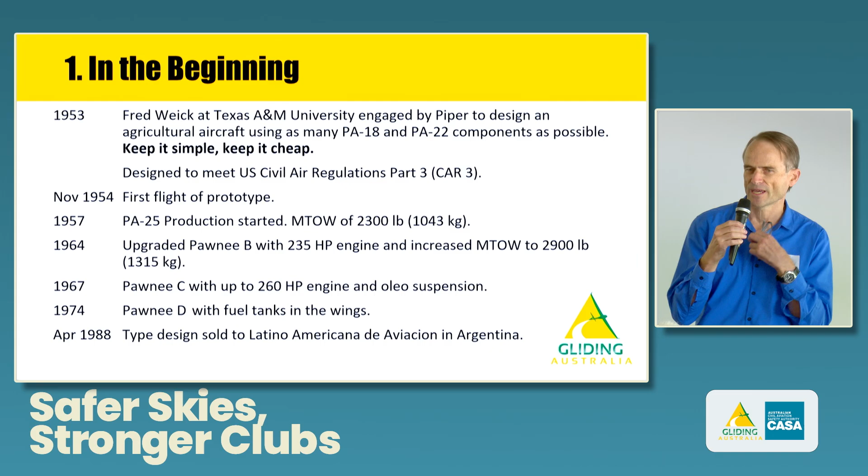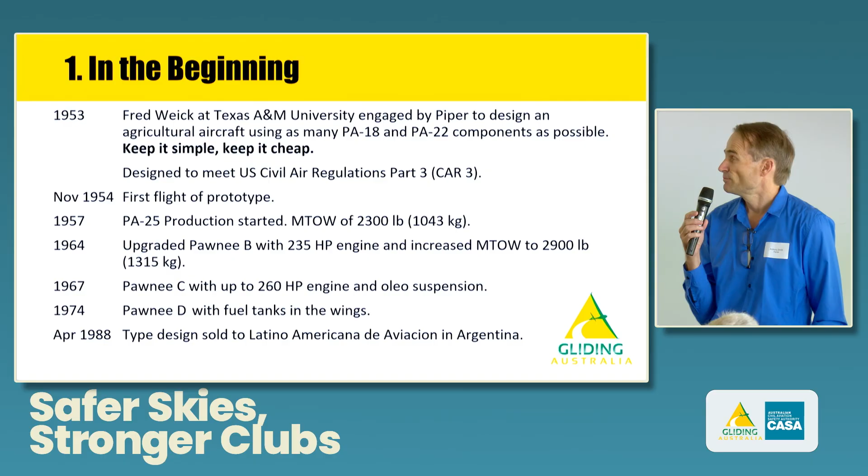So a little bit about the Pawnee and its design history. A chap called Fred Weick was working at Texas A&M University, and as a design project came up with a purpose-built agricultural aircraft. Most of the aircraft doing ag work at that time were converted military types. He ended up being engaged by Piper to develop the design into what became the prototype Pawnee, and they used as many of the Super Cub and Tri-Pacer components as possible in order to keep the costs down.

It was designed to meet US Civil Air Regulations Part 3. This is the 1950s design regs. Important thing to remember, in those design regs, there was no requirement to do any kind of fatigue analysis on the airframe. Fatigue was not understood back in the 1950s. So it was designed to static strength requirements. That was it. No lifetime requirements were considered.

It started production in 1957. The maximum takeoff weight was 2,300 pounds. I'm sorry, because it's an American aircraft, I'm going to default to imperial units. I'm sorry for all the metric people.

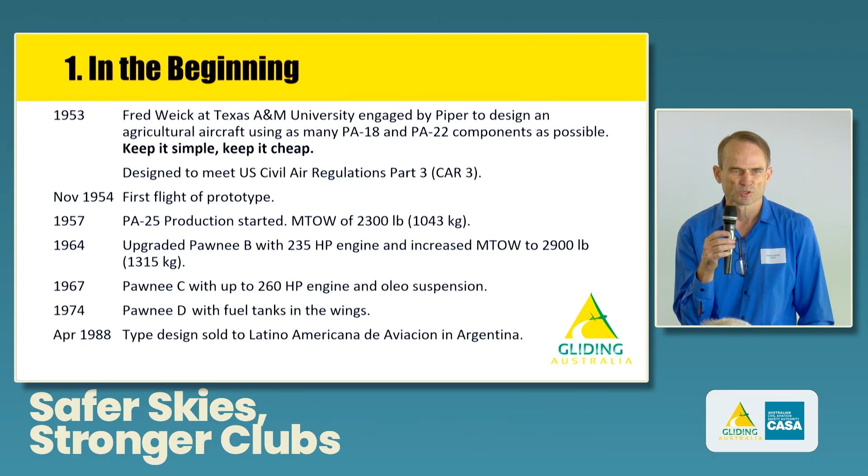In the 60s, it got upgraded to the Pawnee B, with more powerful engines, but importantly, they increased the max takeoff weight to 2,900 pounds.

They introduced the Pawnee D with fuel tanks in the wings in the mid-1970s. Production wound down into the early 80s, mostly because sales had dropped off, as other larger airframes like Air Tractors were becoming more economic.

The design got sold to the Latino Americana de Aviacion in Argentina, also known as LAVIASA, and they started production of their own version there. I do not know how many they've built.

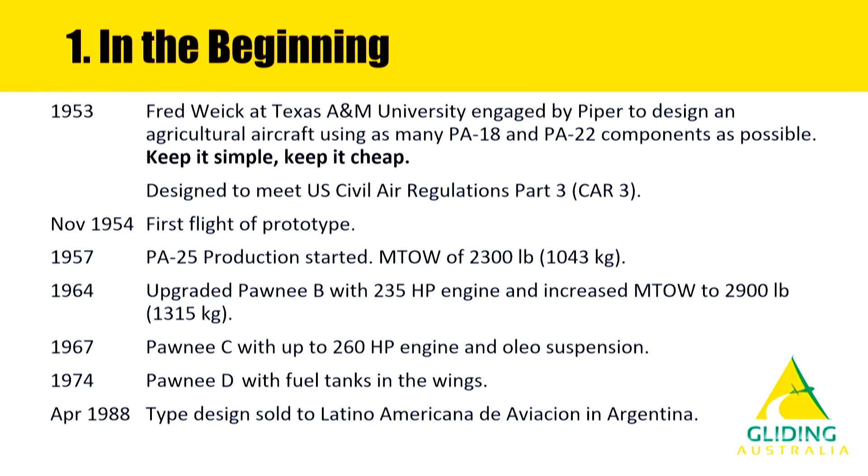One of the questions I get asked routinely is, why aren't we seeing inspections on the Super Cub? It's the same wing. So a little bit about forces on the aeroplane.

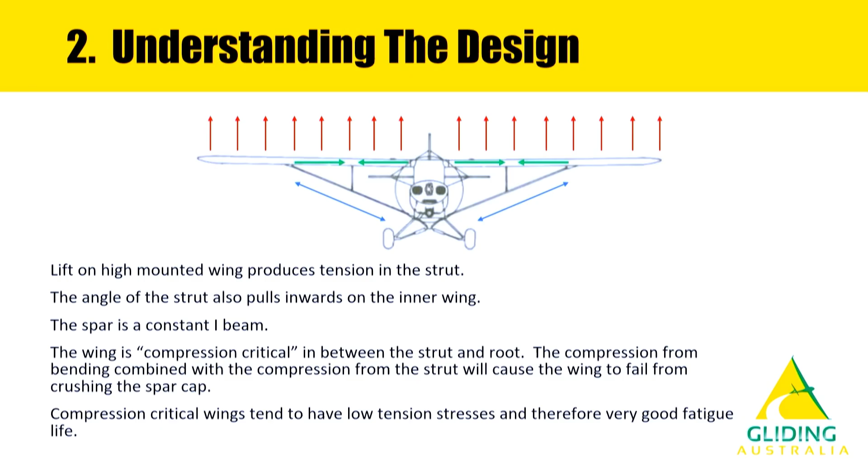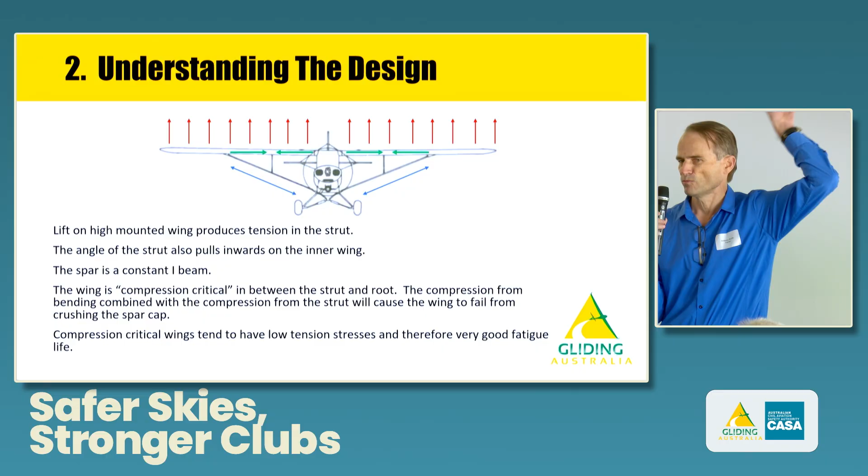Wings producing lift. The struts on a high-mounted wing are being held in tension, pulling the wing down. If you imagine these struts trying to pivot around the fuselage, if you try to lift those struts up, they're going to pivot inwards towards the airframe, putting compression on the inboard wing between the strut and the root.

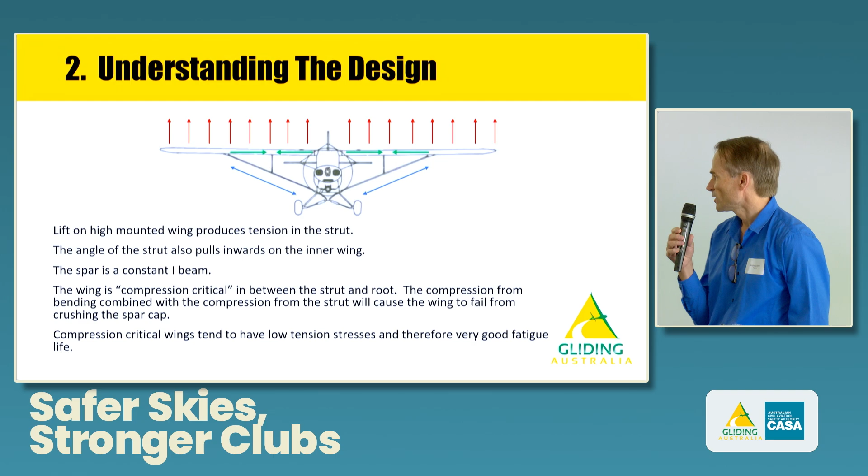This is what we call, in engineering terms, a compression critical wing. The compression from the bending and the compression from the strut add up such that the failure mode will be crushing of the spar cap, a bit like a Coke can. Compression critical wings will have low tension stresses predominantly and therefore very good fatigue lives.

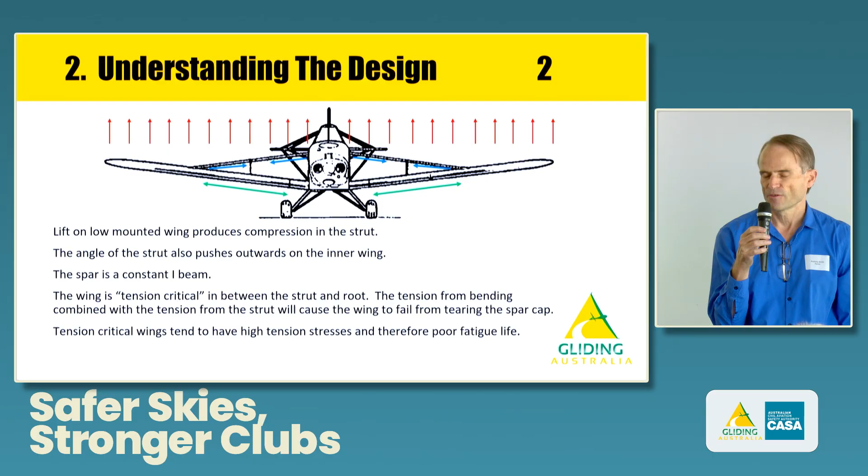The air loads put a bit of an S-curve in the wing, so we get tension on the underside between the strut and the root, combined with tension from the strut reaction, and the critical failure mode is tearing of the spar cap apart. These tension critical wings have high tension stresses and a much lower fatigue life as a result.

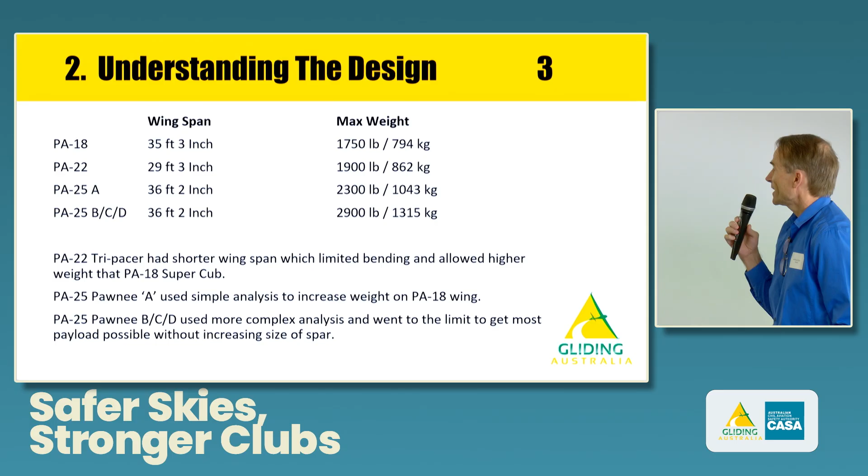Some design history: the PA-18 wing is very similar to the Pawnee's, with a max weight of 1,750 pounds. They increased the weight for the Tripacer by shortening the wingspan, so there's less wing bending on the Tripacer, and that's how they bumped up the max takeoff weight.

With the Pawnee, it's got the same wingspan between root and tip as the Cub, just with a wider fuselage. They increased the weight to 2,300 pounds. I've been fortunate to have a copy of part of the analysis used for the early model Pawnees, and it's a pretty simple wing analysis, stress-wise.

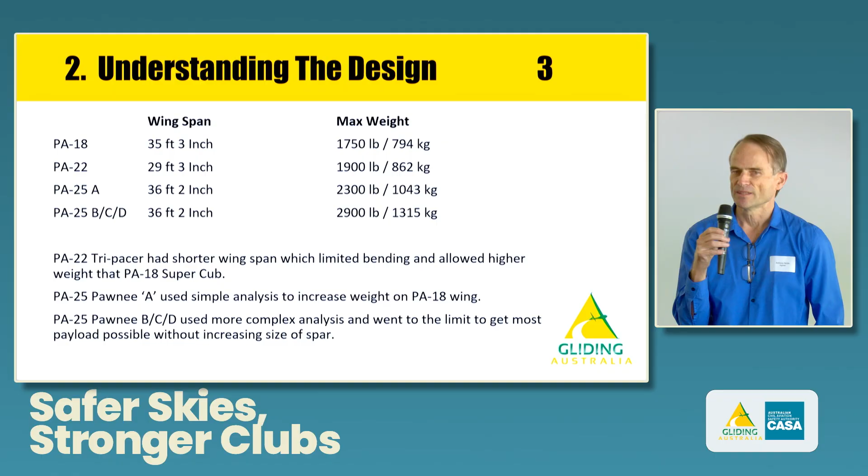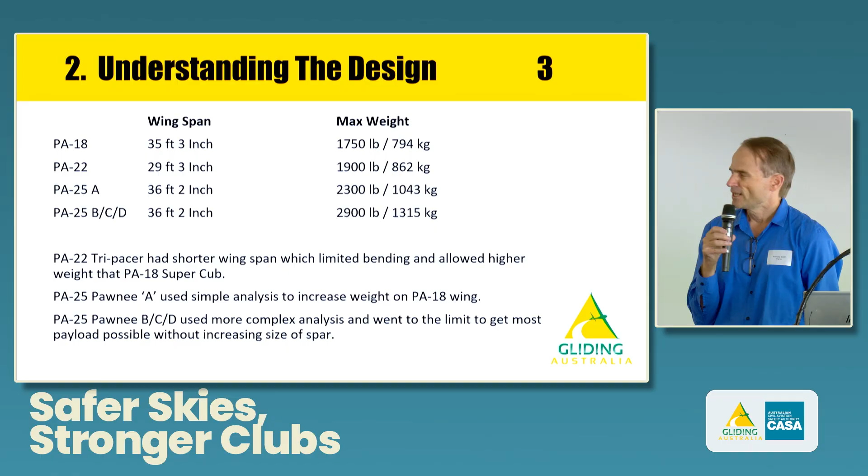With the B, C, D models and the increase in max takeoff weight, they took that design to the limit. There's no fat left in that wing, no residual strength whatsoever. It's taken to the absolute limit to get that 2,900 pounds, so we're working at very fine lines on the structural envelope of the aircraft to achieve that.

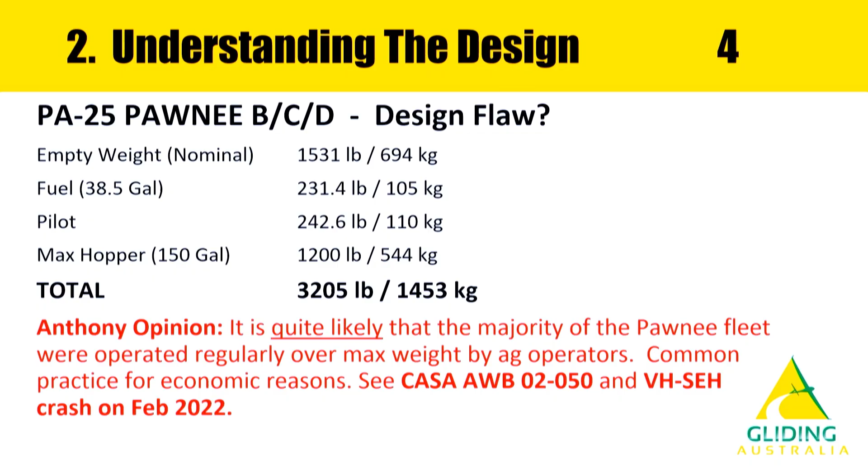Coupled with that, there's potentially what I'd consider a bit of a design flaw in the aeroplane. It has a hopper that can contain 150 US gallons, carrying 1,200 pounds of water, or roughly 1,200 pounds of superphosphate, depending on how granular it is. If it's a pretty fine grain super, you can get more than 1,200 pounds in the hopper.

That means with full fuel and a mature body-shape pilot, you can end up well over 3,200 pounds, well over your max takeoff weight. It's my opinion, and there are quite a few anecdotes out there, that the majority of the Pawnee fleet operated by the agricultural community were routinely operating above max takeoff weight.

That puts a lot of stress on the airframe. Now, CASA did put out Airworthiness Bulletin 02050 that allows agricultural operators to operate beyond max takeoff weight, but on the proviso that they do a fatigue analysis and work out the life of the airframe. I'm not aware of that fatigue analysis ever having been done, but I'm pretty sure the operation was happening above max takeoff weight.

Even recently, the crash of Sierra Echo Hotel, an ag operator in Victoria—the ATSB can't prove it, but they're pretty sure the aircraft was trying to take off overweight and simply didn't have the performance available for the runway length it had at the time.

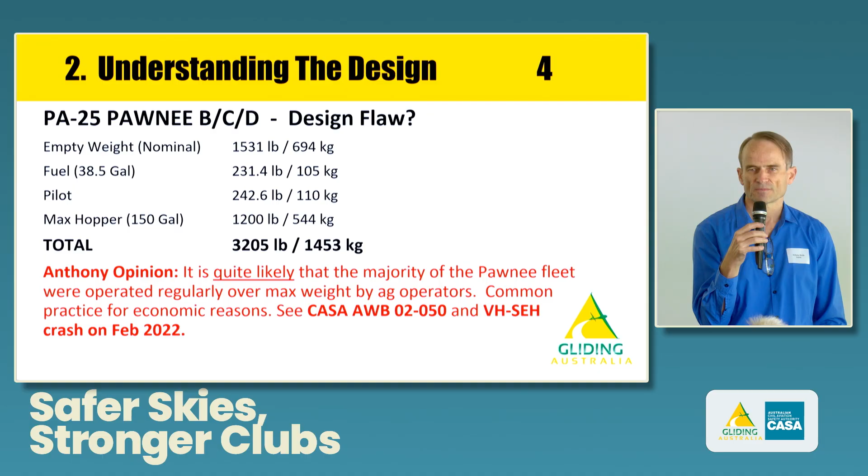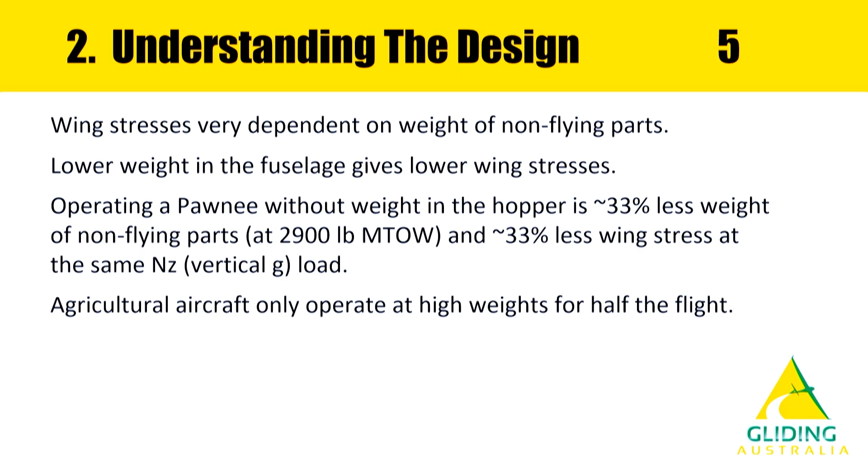So wing stresses are very dependent on the weight of the non-flying parts. If you have less weight in the fuselage, you have lower wing stresses. Some numbers there: operating without weight in the hopper gives 33% less weight in the fuse, thereabouts, and that means 33% less wing stress for the same vertical G load.

So, in aeronautical terms, NZ is your G load in the vertical direction, NX is your horizontal acceleration fore-aft, and NY is lateral acceleration. So where you see me using NZ, it's all about vertical G.

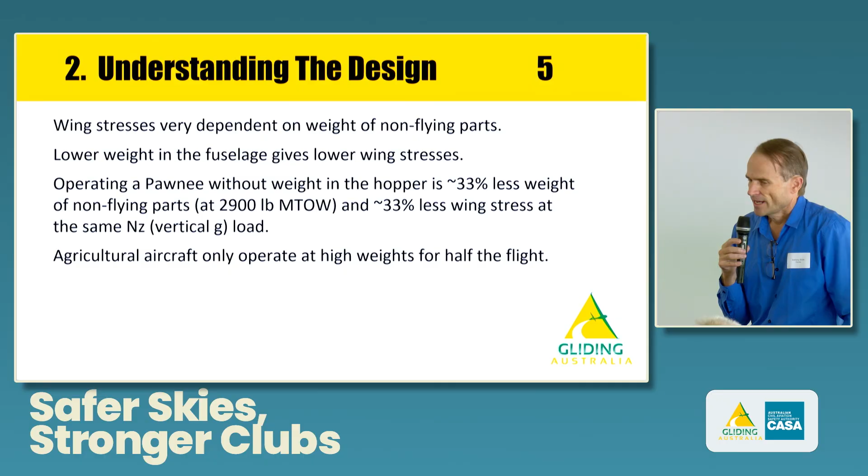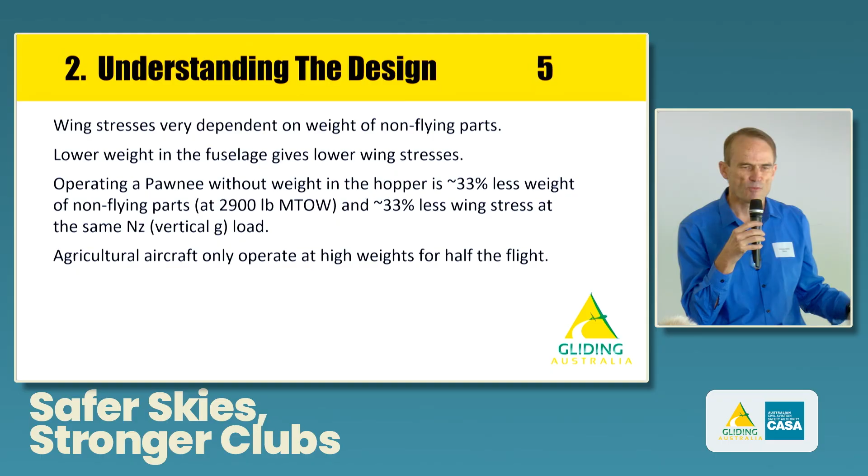Just a reminder that agricultural aircraft only operate at those high weights for half the flight. They are transiting out to the drop zone or application zone, dropping the payload, and coming back empty. So that weight saving and fatigue saving we get from operating the aircraft very lightweight is not quite as apparent as operating the aircraft at high takeoff weights for 100% of the time.

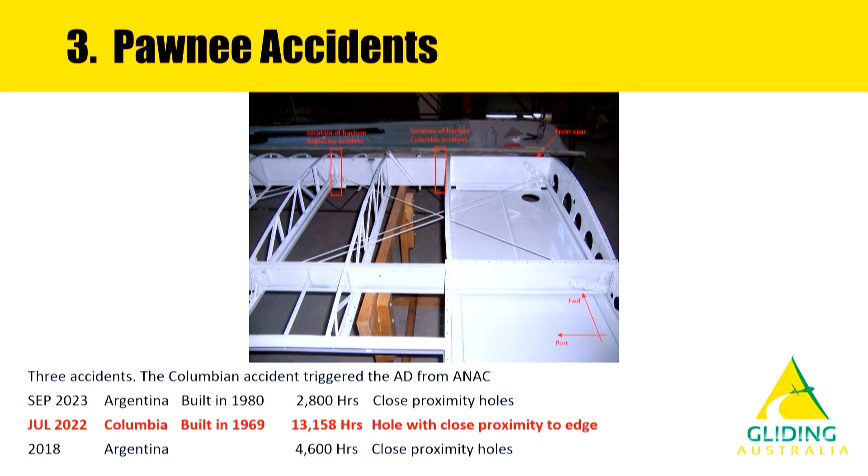So some recent Pawnee accidents that I can find evidence on. There were 3 accidents mentioned in the service bulletin concerning the holes and the corrosion. I can only find an accident report for one, which is the Columbia accident in 2022. This appears to be the accident that spawned the AD.

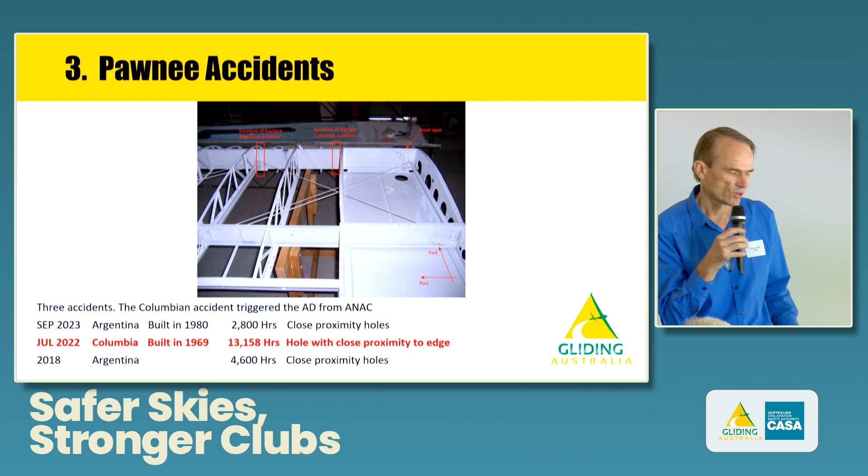The aircraft had 13,100 hours on it, and it was caused by a hole in close proximity to the edge of the spar. That's the accident aircraft on the left.

The right-hand wing separated as he pulled out of a shallow dive to begin an application on a rice paddy. The aircraft cartwheeled into the ground, hit nose first, ended up inverted against a tree. The pilot was able to extricate himself out of that mess as the wreck caught fire, had minor burns to his ankle as he got himself out of that.

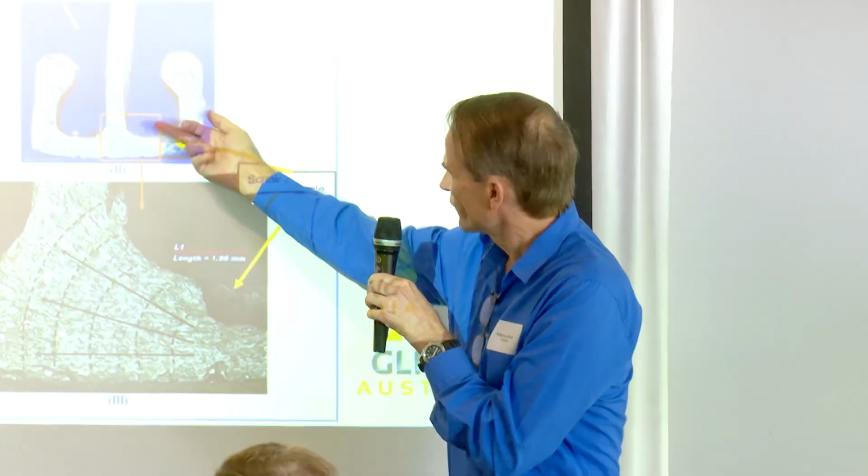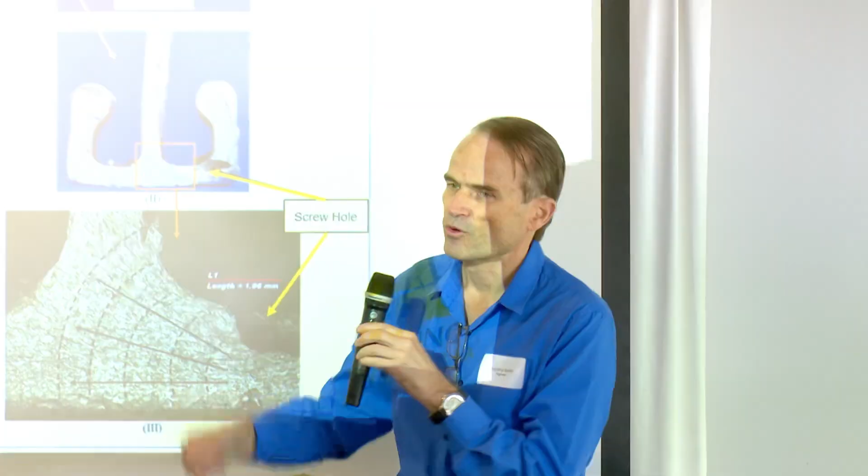The failure was caused by a hole drilled into the corner of the spar cap for a leading edge replacement. The crack expanded from there, severed completely the lower spar cap, had grown up to a point about here before fracturing the spar completely.

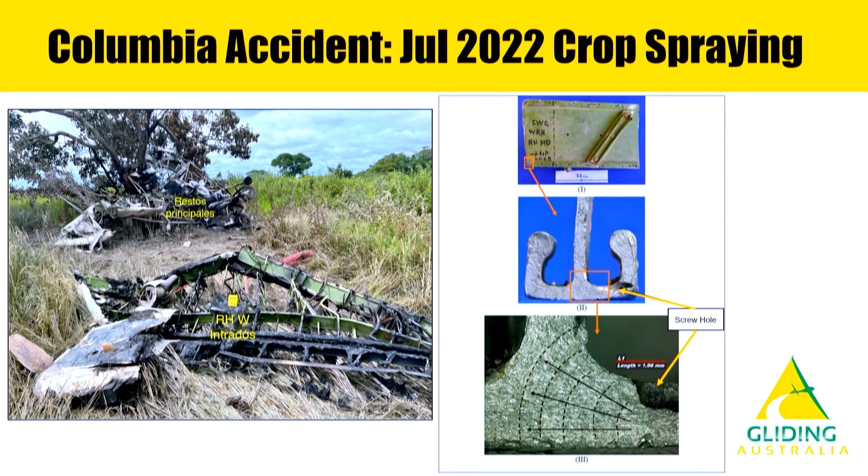Of interest to us is this was on the lower cap between the strut and the root. This is not in one of the current fatigue inspection areas. This is a pretty low stress area of the wing, yet the proximity of that hole to the edge was sufficient to still grow a crack enough that it ended up causing failure.

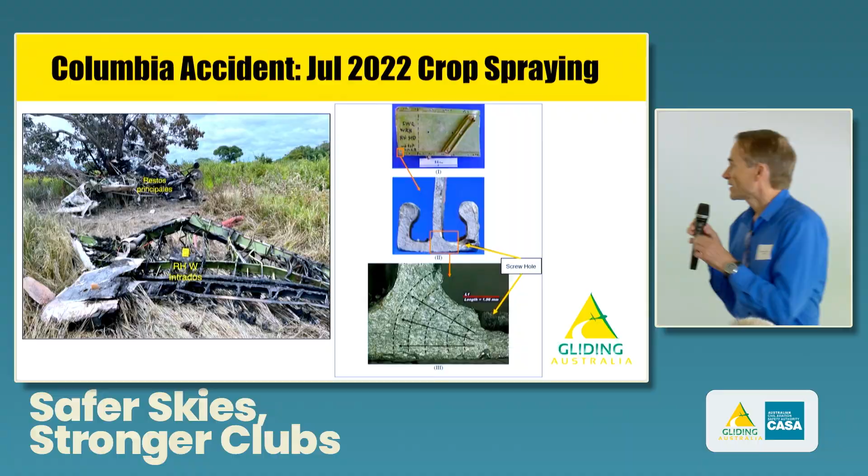And that crack, that hole, was so close to the edge that as soon as they put the screw in, it probably fractured the little bit of aluminium there to start with, just by putting the screw in and severing that little bit of aluminium that was left.

So where are we at with the current inspections worldwide? We're all familiar with the Argentine recommendation, or Argentine AD. We've got an interesting approach to safety by inspection with the aircraft being based on calendar years. We've got the one that we know and love, which is the eddy current every 100 hours or 12 months, whichever comes first.

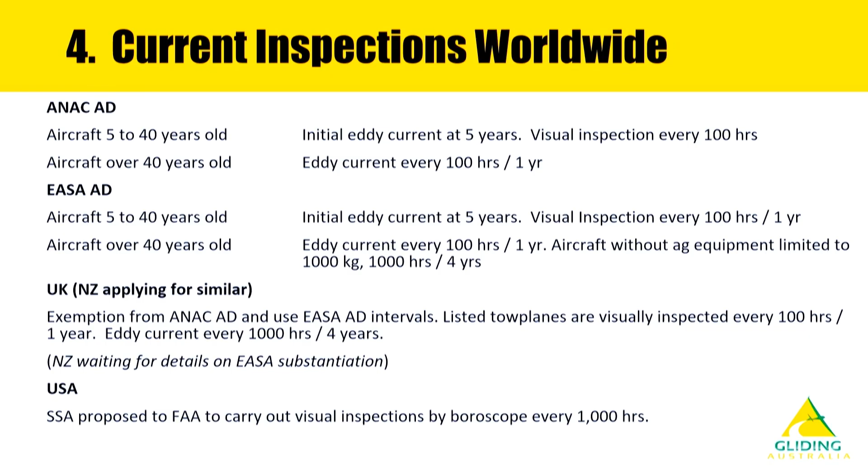EASA have gone their own way. They still retain the age requirement, which is again interesting from an aircraft fatigue point of view. It has the inspections we're interested in every 4 years or 1,000 hours, providing the aircraft is being operated below 1,000 kilos or 2,200 pounds for the uninitiated, and has the external agricultural equipment removed. That means the aircraft has to be placarded to having that 1,000 kilo limit on the instrument panel, and changes to the flight manual.

The UK has recently been successful in getting an AMOC approved based on the EASA inspections. New Zealand is trying the same stunt at the moment. They've put an AMOC in to try and use the EASA inspections in lieu of the Argentines.

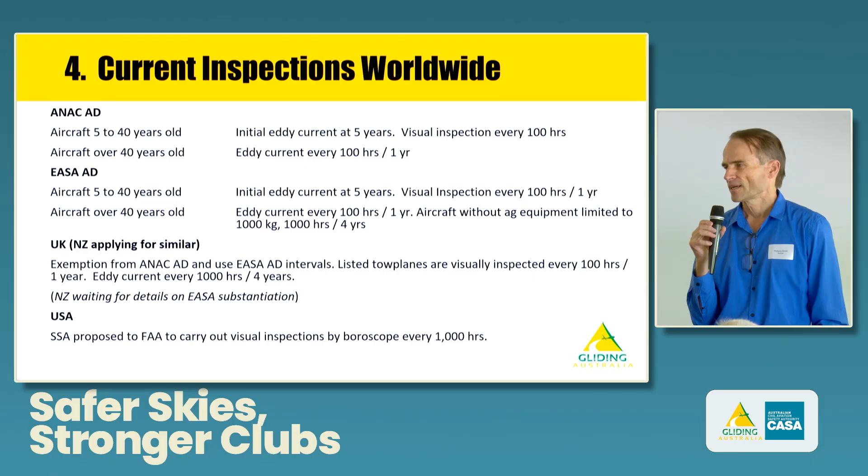They've got a bit of a hold up at the moment where CAA New Zealand is trying to get hold of the substantiation that EASA used. EASA were not able to provide me with the substantiation they used for their AD themselves, but they did provide it to the airworthiness people at CASA. CASA have reviewed that and said it was insufficient to enable approval of an AMOC here in Australia. So it didn't meet their standards.

The USA, the FAA put out a proposed AD warning in early December last year. Submissions were closed on the 1st of January this year. I sat down and spent a lot of time with the Soaring Society of America, helping them put together their proposed inspection. They want to use visual inspections with an inspection camera, not removing the screws where possible, and do that every 1,000 hours.

We're expecting the FAA to make a decision in the August, September timeframe, maybe. It's unknown at this point in time. I am reasonably confident that the Argentines are not going to do anything in the near future until the FAA has made a decision.

So to talk very briefly about fatigue life stuff. There was a lot of interest in the 1970s in Australia and other countries in collecting fatigue spectrum data. Fatigue mechanics as a science had progressed a lot during the 1960s into the 1970s, and was the hot topic in aeronautical circles of the day. A lot of research was being done in the area.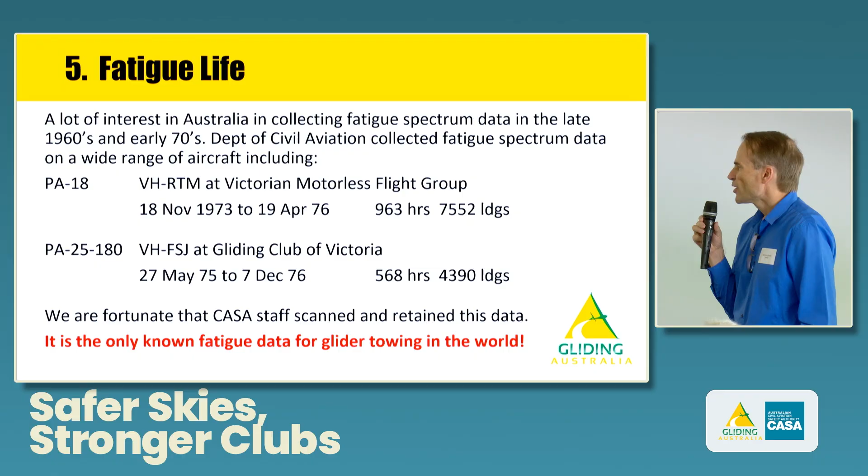We're really fortunate that CASA staff opened a desk drawer, found these sheets of paper lying in the bottom of the desk drawer, no joke, this is real, and they decided to scan it and keep it for posterity. We lost a little bit of data. It was an automatic sheet feeder scanner, and there's a couple of areas where the pages overlapped slightly, so we lost a little bit of data, but not very much. This is the only known fatigue data for glider towing in the world that I know of. It's unique.

And this is what it looks like. To understand these charts, you've got your vertical G on the vertical axis. 1G is straight and level. And you've got the number of times per hour you exceed that G level on the horizontal axis. It's a logarithmic chart, unfortunately, it's the way the data is presented. It makes it a little difficult to interpret.

But you've got three lines there. One is the agricultural use, which is the dark blue line. Glider towing is orange. And I've put in the general aviation, which is the dotted green line. That's for single engine private use from American data.

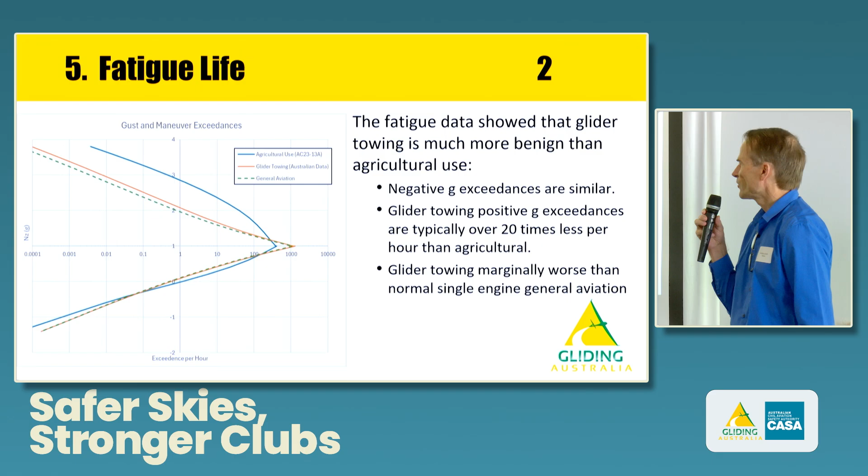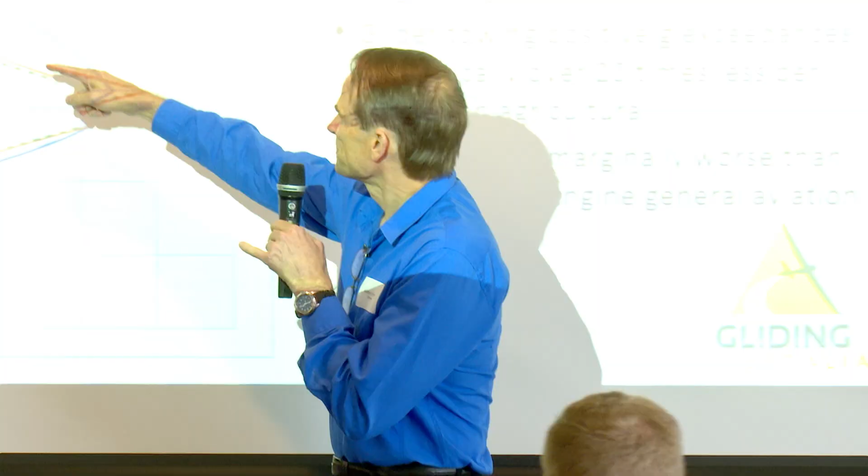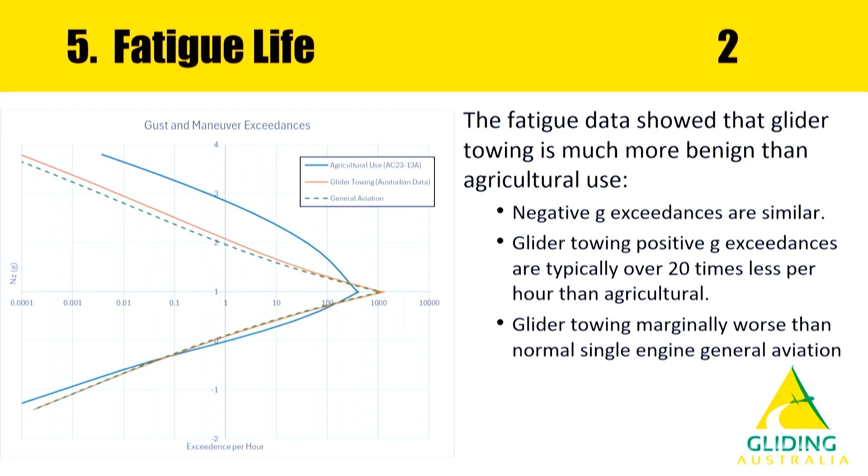So if we were to look at this and say, what's the number of times a glider tug would exceed 2G, it would be 1.5 times per hour. So we're looking at this point of the chart. For general aviation, it's a little less than once per hour. For your agricultural aircraft, 10, 20, 30, 40 times an hour. That's a measure of how aggressive agricultural flying is compared to glider towing.

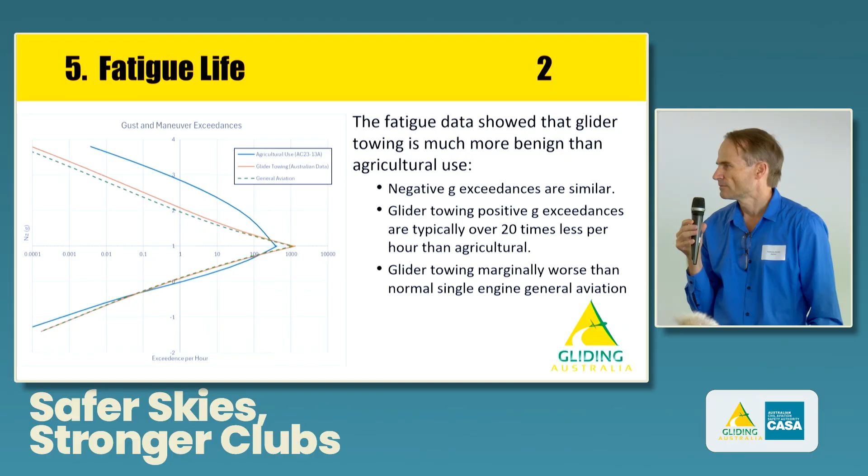So on average, our positive G exceedances are around 20 times less per hour than agricultural. We are marginally worse than normal single-engined general aviation, and that's mostly because we are doing so many flights per hour. We're doing a lot more circuits per hour. The negative G is pretty much the same between all operations.

When I've been working through the numbers, it's become pretty apparent that what's driving the fatigue life on both agricultural aircraft and glider towing is the ground-air-ground cycle. So wings on the ground, wings in the air. Wings on the ground, wings in the air. It's that bending cycle between those.

In Australia, the data shows that agricultural aircraft are doing 9 flights per hour. It's the way that they would deploy to a paddock or a farmer's strip, load up the Pawnee, hop over a couple of fences, start applying, hop back over a couple of fences, land, reload, go again. Whereas in America, they were doing 4.7 flights per hour because they were using a regional airport, transiting out, applying the super, transiting back. In comparison with glider towing, we are averaging 7.8 flights per hour, which is around 6 times more than what the general aviation average was, which is 1.3 flights per hour.

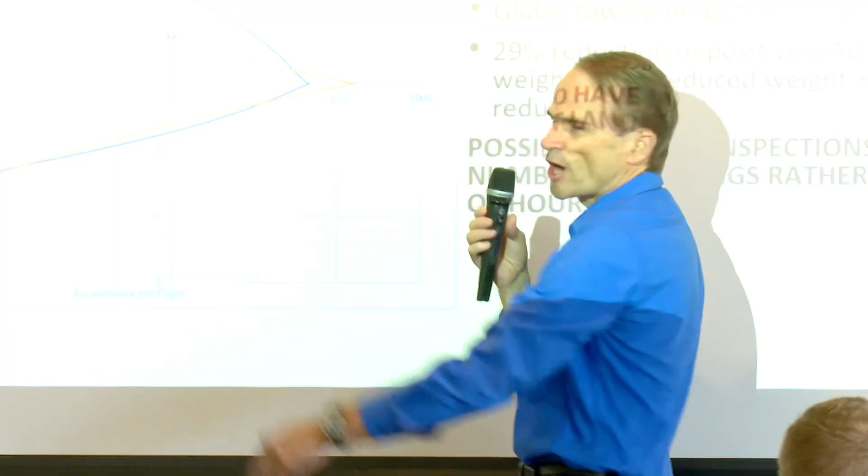Now, this chart on the left-hand side has been modified a little bit from the previous chart, and you see this is the exceedance per flight. So I've worked out how many times per flight we end up going to a particular G level, and you can see there's considerable saving there.

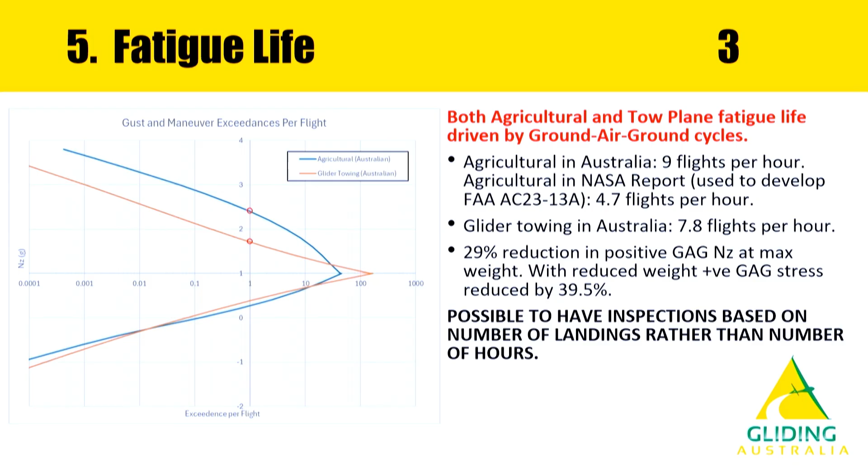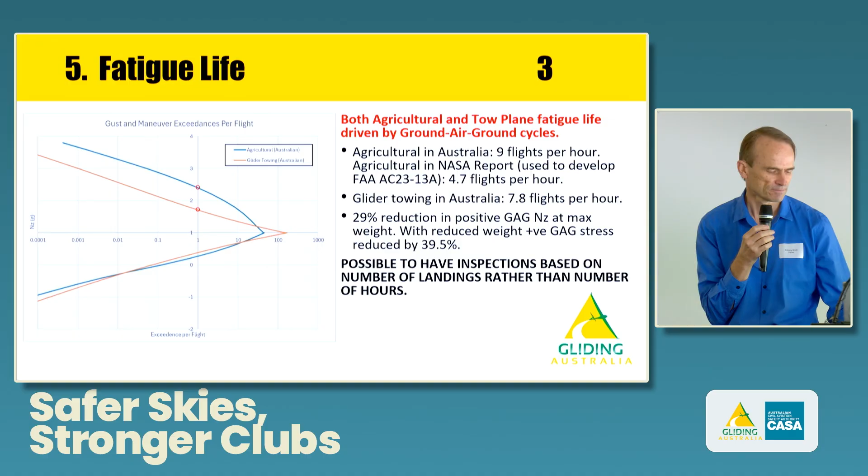However, while working through this, given that agricultural aircraft are doing all their manoeuvres, all their high G stuff each flight, the length of the flight is rather irrelevant because that's just straight and level transit. It's probably better to actually have the number of inspections based on flights or landings as opposed to per flying hour, which would be your traditional view of looking at fatigue life. And the same goes for glider towing as well.

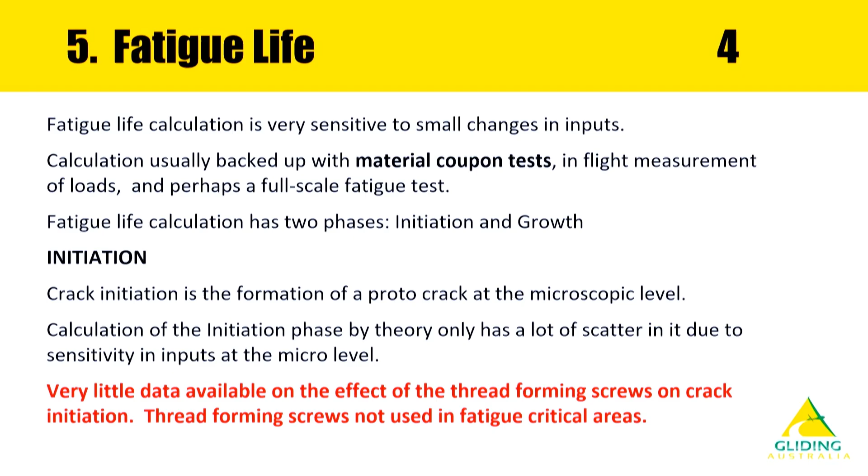When you're working through fatigue life calculations, it's quite sensitive to small changes in the inputs. Normally, this is backed up by a team of people and not just one individual. You have a lot of material coupon tests to back up the theoretical numbers you're plugging into software, in-flight measurement of loads, and perhaps even a full-scale fatigue test. And I'm pretty sure people have seen either images or videos of airliners or large transport aircraft in the rig having their wings stretched up and down repeatedly, day in, day out.

We are probably going to get some material coupon tests, and I'll talk about that in the next slide. When we start talking about fatigue life calculations, you've got two phases: an initiation phase and a growth phase.

With the initiation phase, we're talking about the formation of a proto-crack at the microscopic level in the metal. It has a lot of scatter in the calculation just due to the differences in the metal and changes at the micro level. We have a bit of a problem in that we are using these thread-forming screws in the metal - it's not a clean round hole - and there is very, very little data available on the effect these thread-forming screws have on crack initiation.

Because thread-forming screws are not used in fatigue-critical areas on aircraft design, this is possibly the world's only aircraft where this happens.

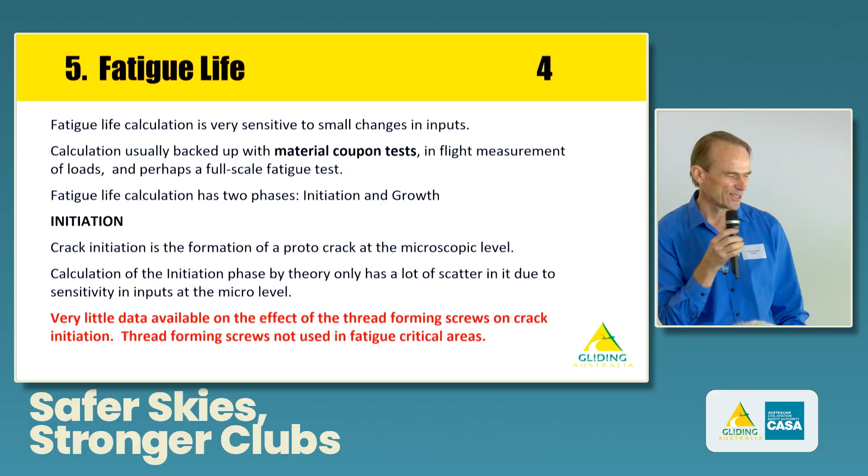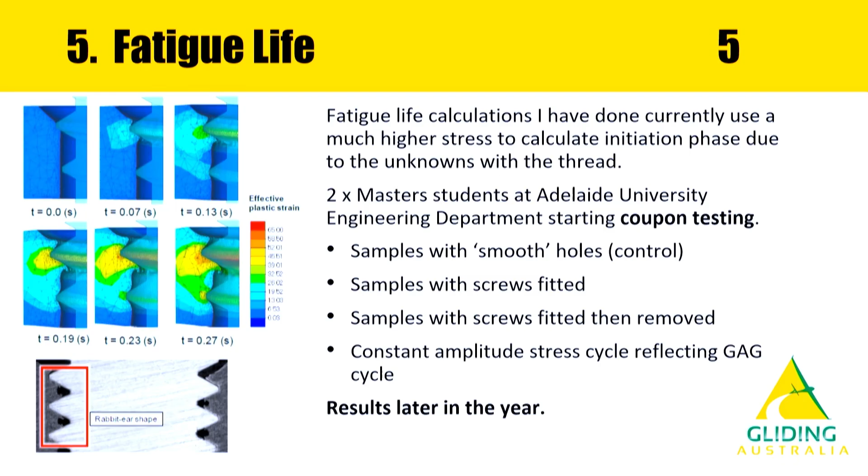So at the moment, when I present the numbers, just bear in mind that I've had to account for a few known unknowns here. I've used much higher stresses at the screw holes to account for the fact that I don't know quite what's going on with the thread-forming screws at the moment.

As of beginning of March, I now have two master's students at Adelaide University Engineering starting coupon testing, where we are going to be getting some samples of 6061 T6 aluminium sheet, not extrusion, sheet metal. We're going to get some little samples in a machine that's going to stretch the metal repeatedly for hours on end to start developing cracks at holes.

We're going to do three batches: a smooth round hole, which is going to be our control batch, some samples with screws fitted, and then samples with screws fitted then removed. Then we can start trying to sort out what the impact of the screws are on crack initiation and development. The results will come out later this year.

The imagery on the left is from a Japanese technical paper published in 2024 talking about the stresses imparted on the metal as the screws are inserted into it. Some of the interesting things is what they theorise: as the screw is being inserted, it's shearing the metal around with it as it's deforming the thread, so it's being carried along with the thread and then moving down the thread as it goes along. So you're getting these wave patterns as it's being deformed.

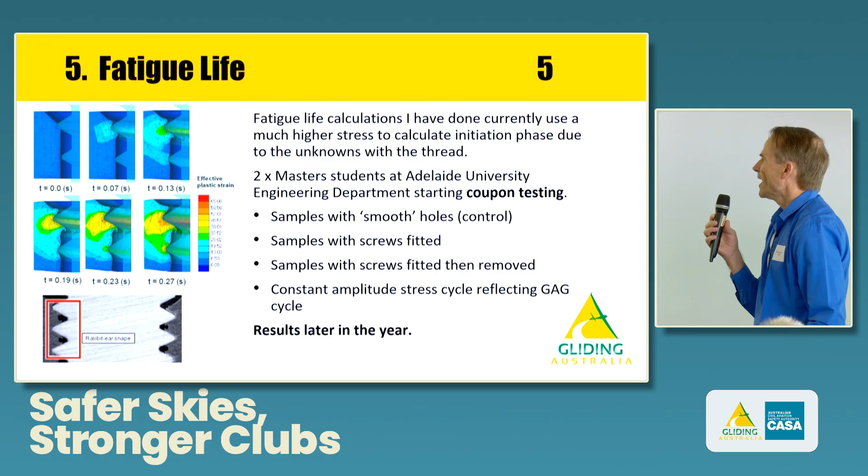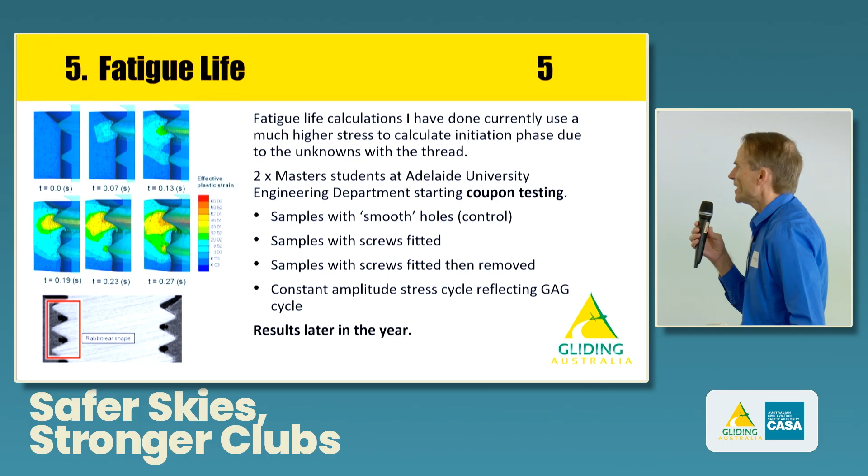The other downside is that around the area of metal that's been deformed, you'll have a donut of metal that's still being stretched, but not enough to deform it. That area of residual tension will result in, if the crack goes into there, it will accelerate the crack growth because you've got this extra bit of tension from around that field. We will hopefully get some results on that later this year.

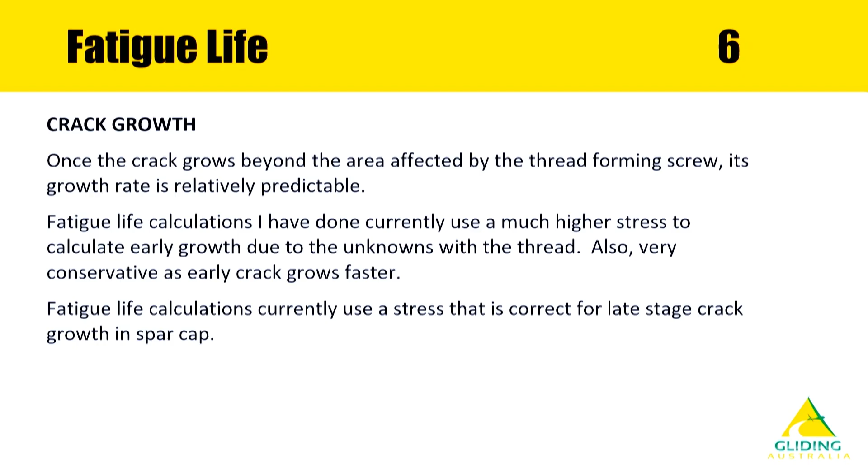Once the crack grows beyond the area affected by the thread-forming screw, it's relatively predictable mathematically, give or take a bit. Again, I've used a much higher stress in the early stage of the crack growth, mostly to do with the unknowns with the thread, but that stress is pretty good for the late stage. If the crack grows into the spar cap, I'm using the spar cap stresses, so the crack growth rate in that late stage is pretty good.

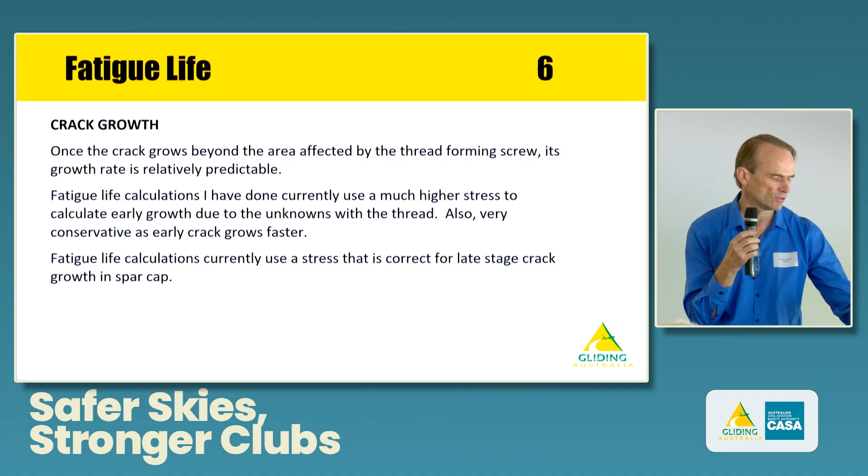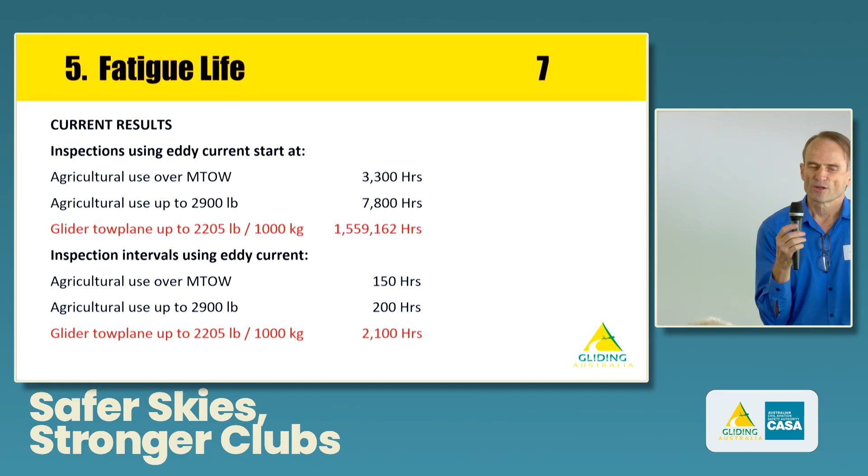So these are the results at the moment based on using eddy current as your inspection technique. You can expect to start finding cracks in an agricultural aircraft that's been operated regularly beyond the max takeoff weight after about 3,300 hours of use. If the ag pilots behave themselves and stay below max takeoff weight, 7,800 hours. That's not a bad number.

When I went into this, I was thinking, based on other work and other aircraft types, 8,000 hours on an ag aircraft is pretty reasonable as an answer.

For a glider tow plane with spars that have only done glider towing, that's something astronomical. We are so benign, it's not funny. That 1 million hours is not a joke. Even if you don't trust my numbers and divide that by 5 as an extra safety factor, you're still in the order of 300,000 hours. If you're doing 150 hours a year, what's 2,000 years worth of flying?

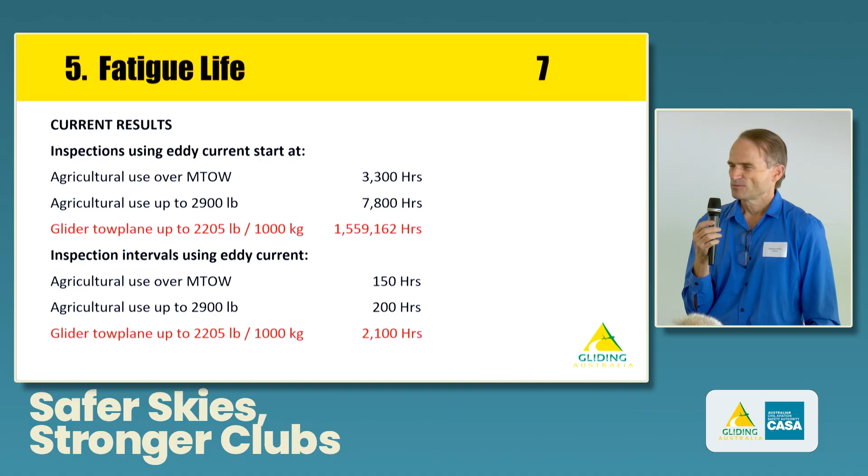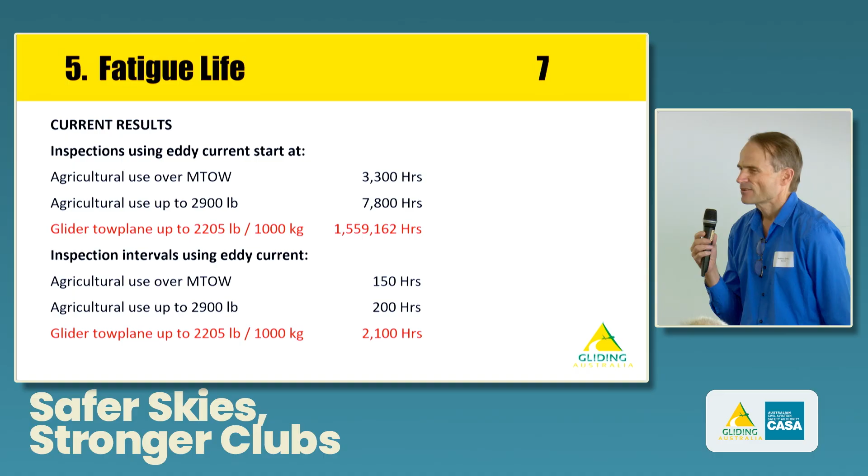Inspection intervals: agricultural use over max takeoff weight, 150 hours. Normal agricultural operation, every 200 hours. Glider tow plane, after it's exceeded these kinds of lifes, every 2,100 hours, based on the numbers at the moment, using eddy current inspection.

And here's where I get lynched. The areas that the AD is focusing on are based on where they've had crack detection and crack failures in service. These have all come out of holes which would be considered abnormal to the design.

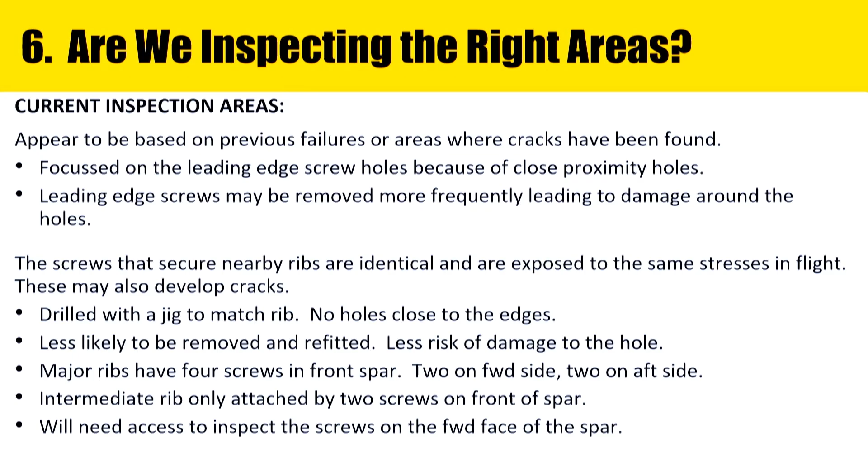Holes that have been too close to the edges, holes that have been drilled too close together. The AD does not allow for these holes to be allowed to go flying anymore, so they should be removed from the gene pool.

Which means what other holes are nearby that are similar to the leading edge screws that are also in high stress areas? Unfortunately, that means it's the rib holes. The screws in the nearby ribs are identical to the screws we're using on the leading edges.

Now these have been drilled with a jig at production so that they fit up to the rib. So they're all very centred to the flange on the spars. There's no holes close to the edge of the rib holes. They're not going to be removed as frequently, so there's less damage to the hole by the remove-refit cycle.

But the major ribs have 4 screws, 2 on the forward side, 2 on the rear side, and the intermediate ribs have only 2, on the forward side. In my opinion, we'll need to start inspecting the screws on the forward face of the spar as well, because they're still a risk area not being addressed by the current AD.

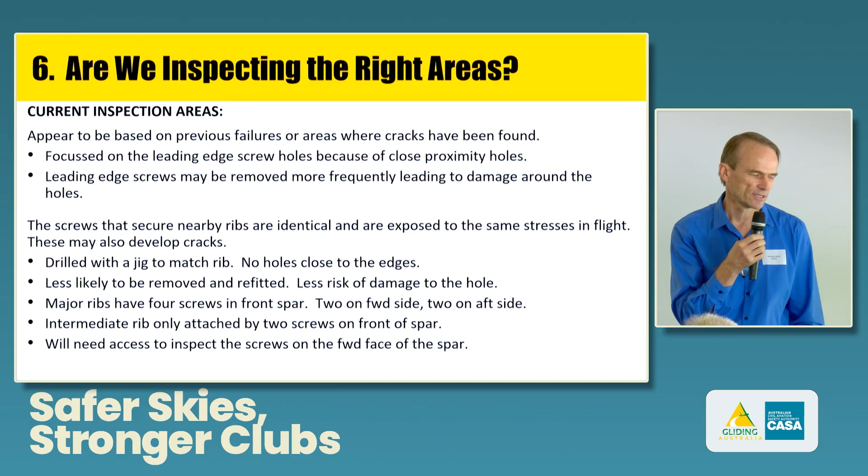So, despite having done all those numbers, I've been asked to reconsider the work I've done so far and try to find a way that we can do this via visual inspection techniques.

This is synergistic with what the Soaring Society of America proposed to the FAA, using an inspection camera that can get into the gap between the flange and the spar web and check for cracks visually, without removing the screws where possible.

Visual detection is the least trusted method of inspection for cracks. Everybody trusts eddy current, nobody trusts visual inspections. This is going to be a pretty hard sell to CASA. We're going to have to come up with some fairly convincing arguments as to why they should allow us to go down this road.

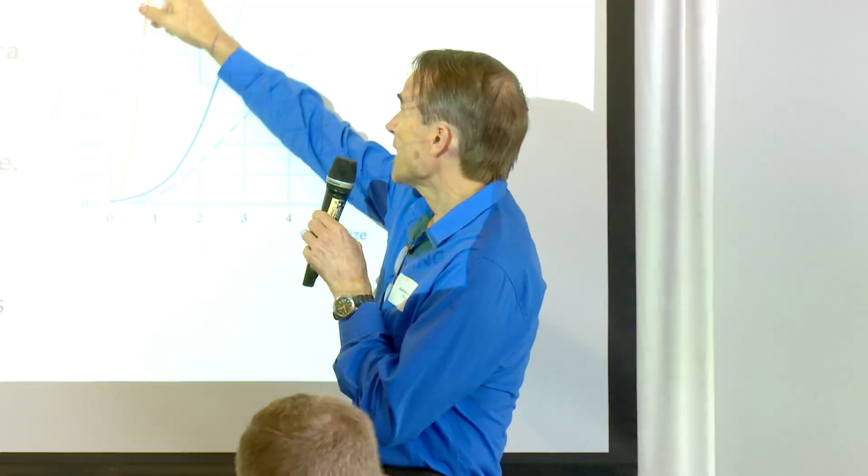When we talk about inspection methods, we talk about how likely it is that method will find a defect that is there. With eddy current, shown as the orange line, there's been a lot of study done on this technique, and it says that at 1¼ millimetre, or 50 thou in the old language, you've got a 90% chance of finding a crack of that length.

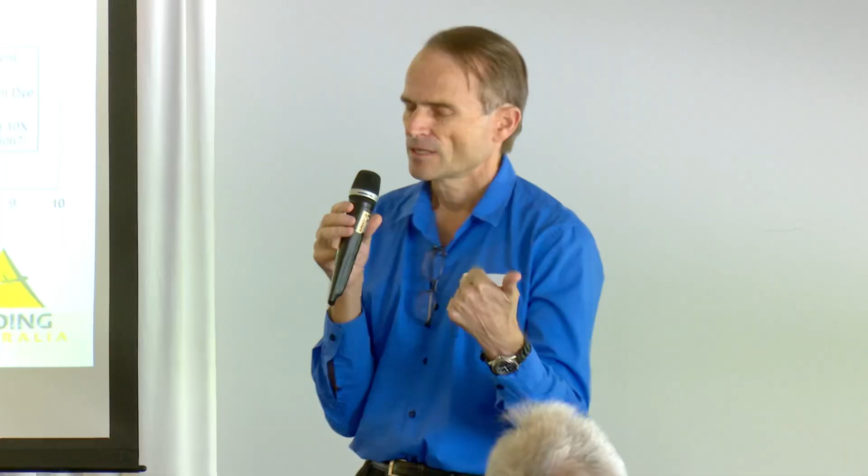So if you're using eddy current, you'll set yourself up to have 3 inspections between when the crack becomes detectable at that 1¼ millimetre length through to your maximum crack length criteria. The first inspection gives you a 90% chance of finding the crack. The second gives you a 90% chance of finding the 10% you missed, giving you 99% in total. The third gives you a 90% chance of finding the remaining 1%, so you're now at 99.9% chance of finding the crack.

We will need to try and do the same sort of thing with visual inspection. The dotted line on the curve is one I've made up based on some Boeing data, and it suggests that a 7.5, nearly 8mm crack would be 90% detectable using visual inspection.

That's a little misleading, I think—I'll talk about that in a future slide. But visual inspection is going to be very dependent on the gear we're using. It's likely we'll need specific equipment with a minimum camera resolution. The proposal already put before the board is that we should consider purchasing inspection cameras specific for this task, which can be hired out to clubs.

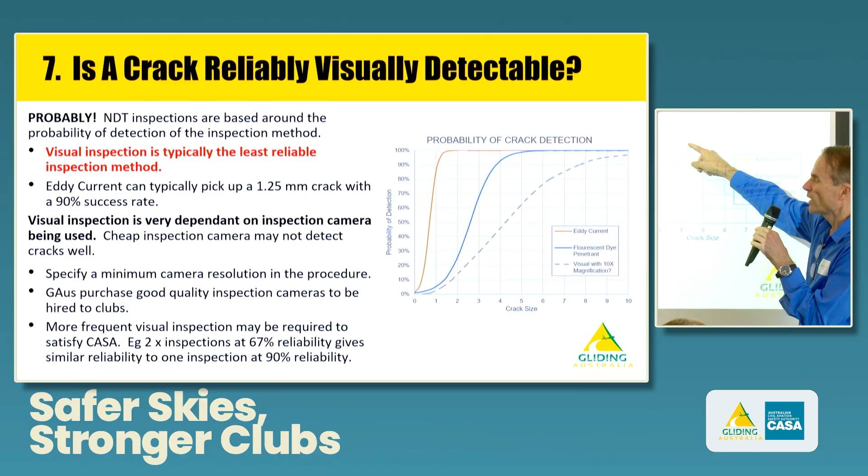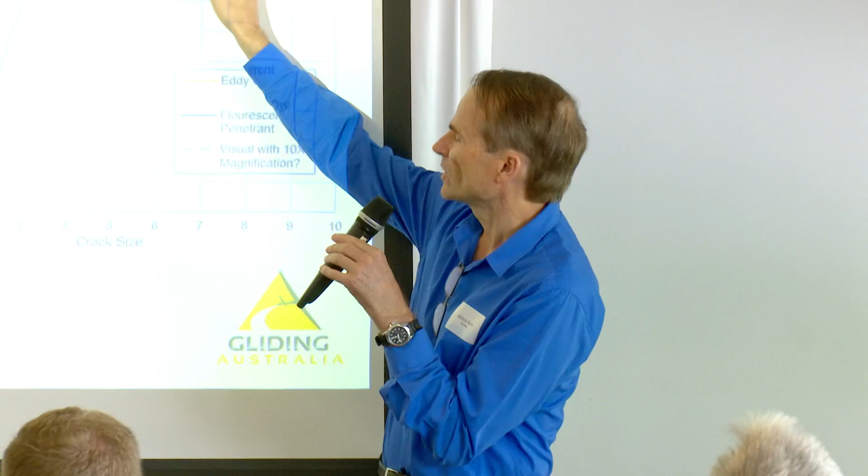The other way of looking at that last dot point is if you aren't happy with trying to find a long crack a few times, you can get that 99.9% chance of detection standard by trying to find a shorter crack more frequently. So you have a decision point: is it worth looking more frequently with a worse chance of detection, or looking less frequently with a better chance of detection? It's a bit of a cycle we need to work through to sort this out.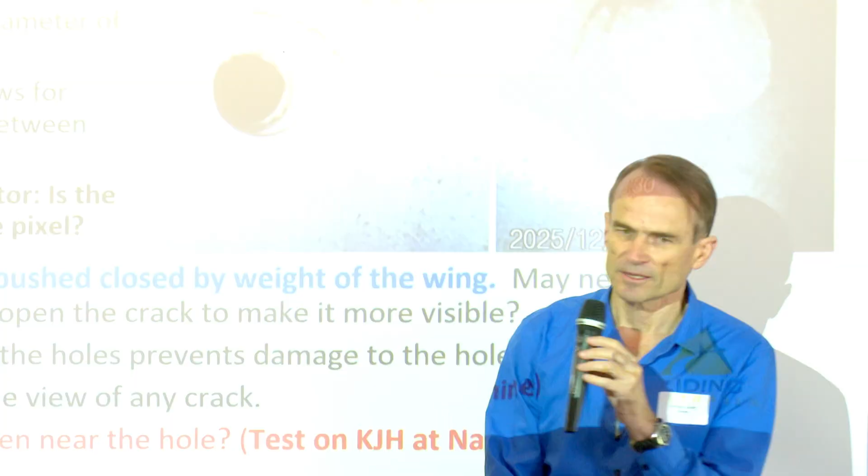These are all inside the flange. Note that all this material has been deformed out of the hole by the screw thread going into the hole. Important to note this little defect here, with the splurge that's come out - that's probably bad enough to give you a false alert with the eddy current, and you can't see that from the outside. So you can have an eddy current giving you a crack alert which is not really a crack.

Some of the things we need to be thinking about: on the ground, the weight of the wing could be holding the cracks closed. Whether or not you can see it on a digital camera depends on whether the crack is actually wide enough to be picked up as a pixel. So it's not so much the length, but whether the crack is open or closed and wide enough to be detected. The counter to this is you may need to apply a little bit of force to the front spar to open the crack and make it more visible.

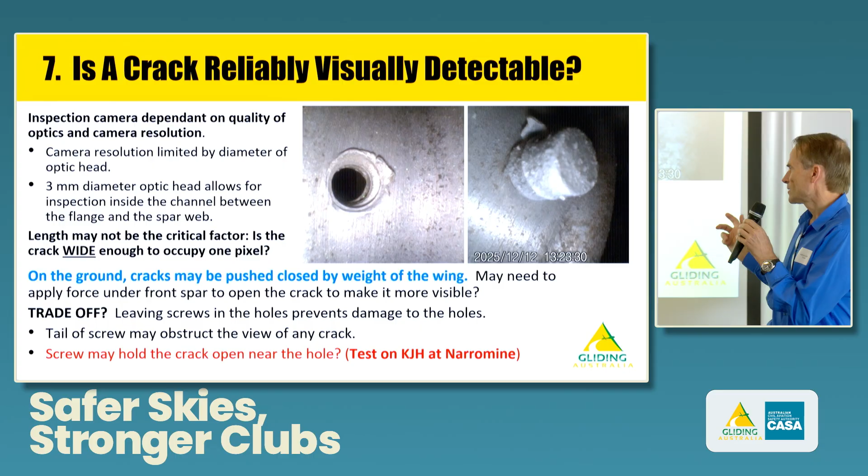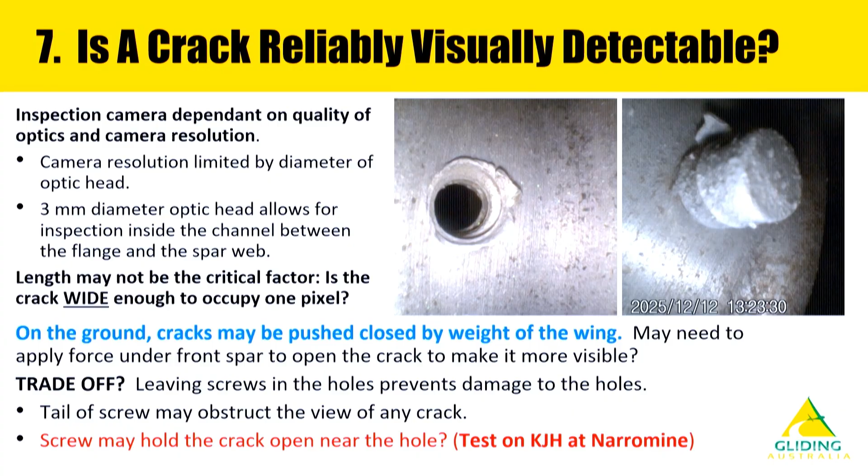The other thought is leaving the screws in the holes has a number of benefits. It prevents damage to the holes. Because you're getting that ring of tension around the outside of that screw, it's going to be opening the crack. Leaving the screw in situ may help make the crack more detectable visually. The downside is the tail of the screw may obstruct your visibility. So if you're looking for a crack coming out towards the flange here, the screw's in the way of a short little crack there - you can't see it. You're going to have to be moving the probe around to make sure you've got a good view either side of the screw.

We've had one crack detection on an Australian aircraft, that's at Narromine. I've now got, as of last week, a 3mm inspection camera here, and today is the first time I've had it in the same room as some Pawnee spar. So if people are interested, we can come have a little play at lunchtime with the camera and the Pawnee spar and see what we can see. But I need to get myself over to Narromine - I've got a diesel car, hopefully there's fuel enough on the way there and back again, or I'm going to be stuck somewhere in the countryside.

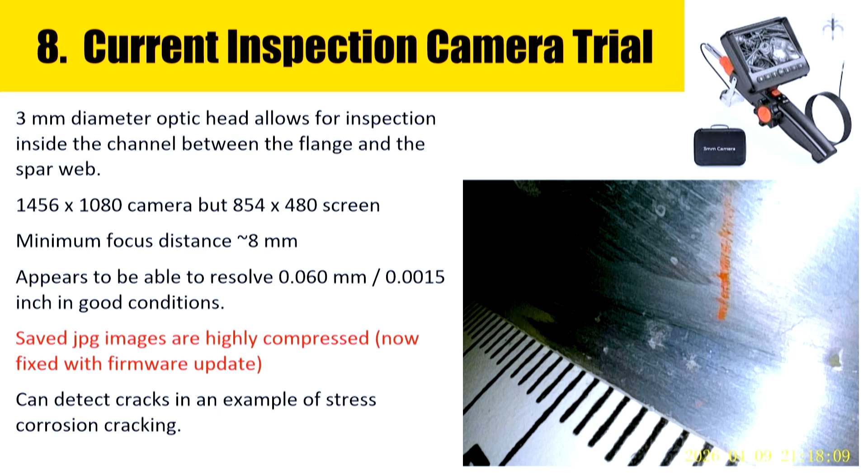Can we see cracks? The camera we've got at the moment is a reasonable resolution camera, but the screen's a little limited - there's a few things we can do there. My testing shows a minimum focus distance of 8mm, which is pretty good. My testing so far shows we can see down to at least 60 microns, which is the diameter of one of my hairs - that's in good conditions. I've been on to the manufacturer - they say JPEG images were a bit grainy because of a lot of JPEG compression. They've now given me a firmware update where that compression's been removed.

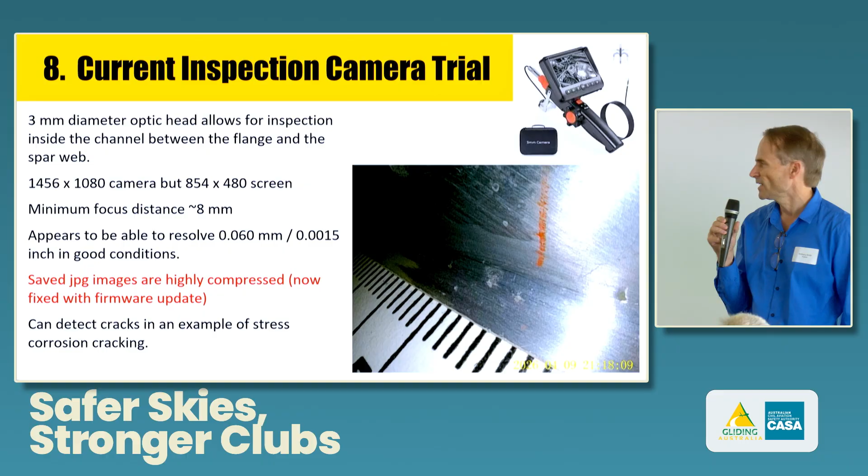I have a lump of aluminium off a P3 at home which has some stress corrosion cracking, and there's an example of it there. These little hairlines are the stress corrosion cracking at an angle of 70-75. Of note is there's a little line there which is stress corrosion cracking - that's all of 2 millimetres long. So it's not so much the length, it's really the width of whether you can detect it with the camera.

I have here a sample from an Arcus, I think it was. I know this is cracked, I know where the cracks are - the cracks are 2.5 to 3 millimetres long. Because these cracks are closed up and very tight, they're not under strain at the moment, I am having a lot of trouble seeing them with the camera, and this is even when I know where they are. So having the cracks open is going to be the critical bit, one of the critical links in this case.

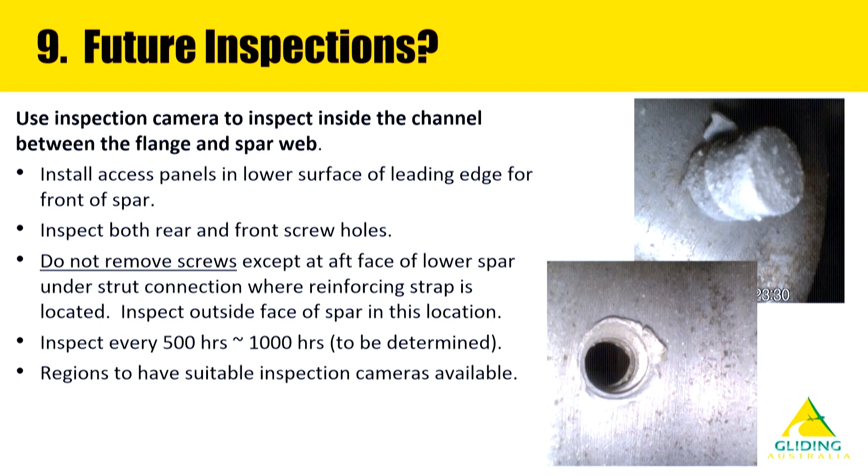So the proposal at the moment is to install some access panels in the lower surface of the leading edge so you can get access to the ribs on the front of the spar. We'll be inspecting both the rear and the front screw holes. This will be in 3 areas: on the wing root on the lower surface in the hard walk area, the existing inspection area on the upper surface between the root and the strut connection, and under the strut connection on the lower spar.

We're proposing not to remove any screws except on the aft face of the lower spar under the strut, where that reinforcing strap is located. It's unlikely we're going to be able to get the camera inside there. The inspection interval may be between 500 hours and 1,000 hours. I haven't done the numbers yet because I've got to work out what sort of crack length we're going to be able to see.

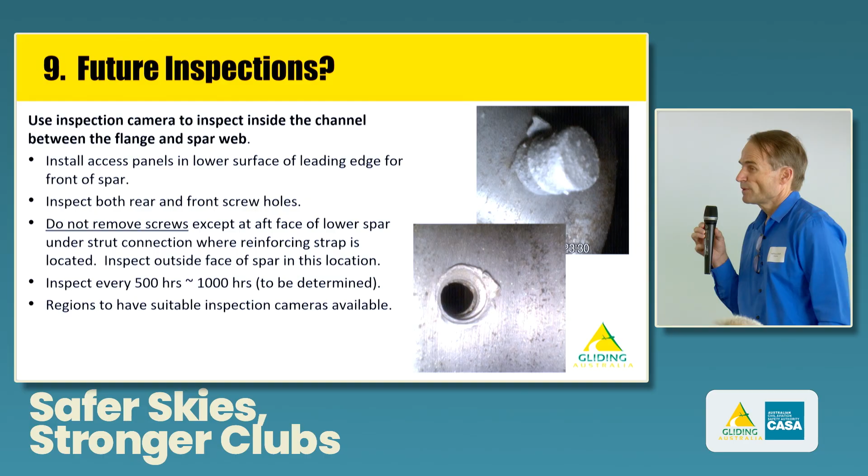The regions will need to have suitable inspection cameras available. The one I've got here is the cheap version with the shorter lead. The long version costs $1,000. So the regions will probably have 2 each, or thereabouts. If you're inspecting every 3 to 5 years, that should be plenty for the clubs to use and abuse.

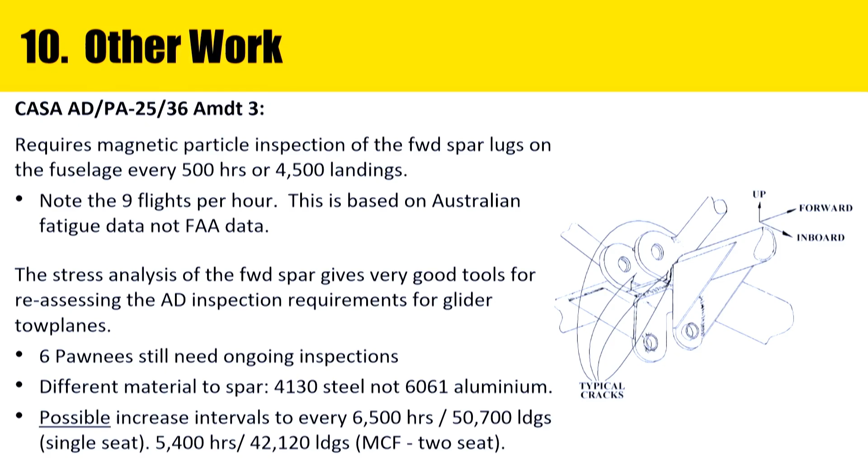Other stuff in the meantime - just because I'm a sucker for punishment and a bit of a masochist - CASA have an AD out for inspection of the wing root fittings. We've got 6 aircraft that still have the unmodified wing root fittings on the fuselage. 5 of them are single seat, one's the 2-seat conversion.

For the stress analysis tools, I created a spreadsheet that calculates in-flight loads on the spars for the Pawnee under arbitrary flight conditions, and another version for landing and another for taxi. That gave me some very good tools in order to analyse what's going on with the wing root connections.

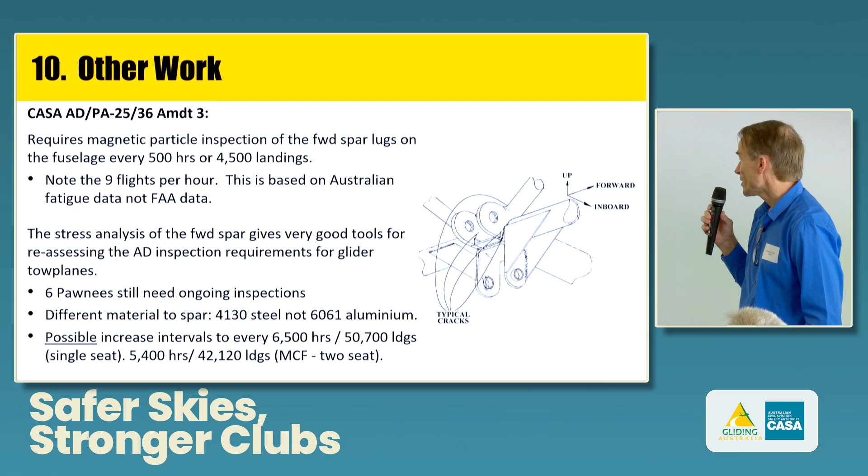I've got a report in with a Part 21 engineer at the moment which recommends increasing the interval to 6,500 hours instead of 500 hours on the single seat, and 5,400 hours on the 2-seat. Now that number for the 2-seat was based on the particular weight and balance of that aircraft - it's not applicable to all the 2-seat Pawnees. So that's with the Part 21 engineer at the moment. Hopefully we'll get that through to CASA in the next few weeks.